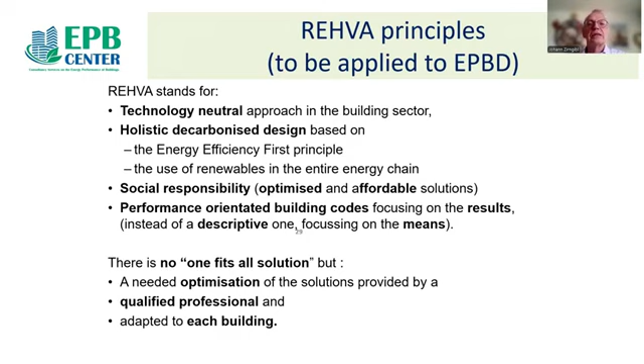Here are some examples of the requirements. For example, what is performance-oriented? Performance-oriented is to fix, for example, an emission level in CO2 grams per square meter and year. A descriptive, not technology neutral approach is saying, for example, phase out fossil fuels. So we will have a forbidden technology, and for the building designer it's much more complicated, with fewer possibilities to optimize the building.

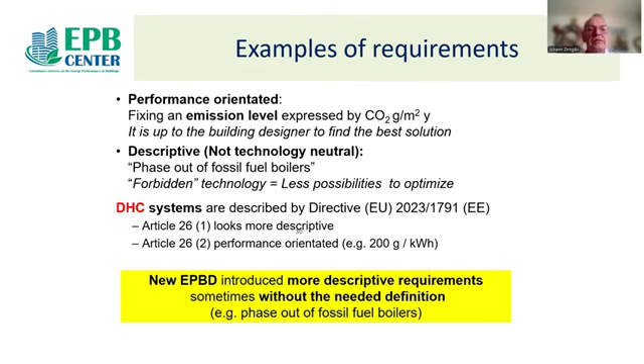I see that it's my old presentation, because in Article 26, for district heating, you have a description which is also performance-oriented, in Article 26-2. So to summarize, the new EPBD introduces, in our understanding, many more descriptive requirements, sometimes also without providing the needed definition. As Andras already said, it is, for example, the phase out of fossil fuel boilers. Next slide, please.

To really understand what is in the background of the requirements, the key definitions are key, and this is the first step for an unambiguous implementation. I put here some pictures just for illustration. No need to go into details; I will just recall some very important definitions, like primary energy. Here you have the primary energy classified by its origin, which is called perimeter. So you have on-site, nearby, and distant.

On-site and nearby are defined in the EPBD. Distant is everything which is not on-site or nearby, but it is not defined. So the perimeter is very important, especially for the ZEB definition. Other important definitions are primary energy, of course, and then you have to distinguish between renewable, non-renewable, and total. This is very important because if you set requirements in renewable, non-renewable, or total, the technical solutions behind them will be quite different.

Very much important is also the energy balance. Victoria told already about how you calculate the performance of the building. Do you take into account or not, for example, the exported energy, for example, by PV or something like this. This is absolutely key, and it is not defined in the EPBD. And of course, the assessment boundary, where you count the exported and the delivered energy.

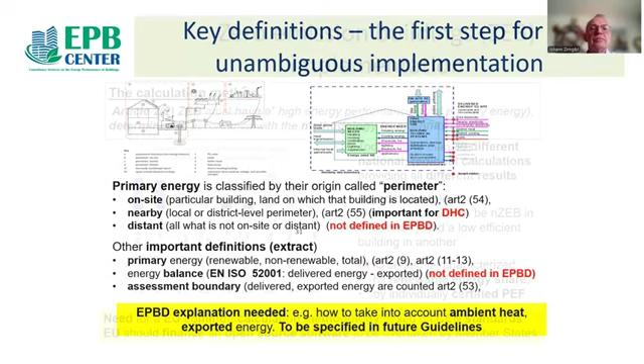Yeah, and now here it comes to the zero emission buildings implementation. The calculation method, Article 2.2 says that, of course, the energy performance has to be calculated according to the methodology of Annex I. So this is a calculation methodology. But it's a problem because today in Europe we have more than 30 different calculation methods providing all different results.

There is no comparability, and the same house can be a ZEB building, or let's say a near zero energy building in one country, and can be a very low efficient building in another, depending on the calculation method. And here in the picture, you just have some examples. No need to go into details, but for the same building, you see how only with different hypotheses you can reach quite different results. And of course, there is a need for a calculation method.

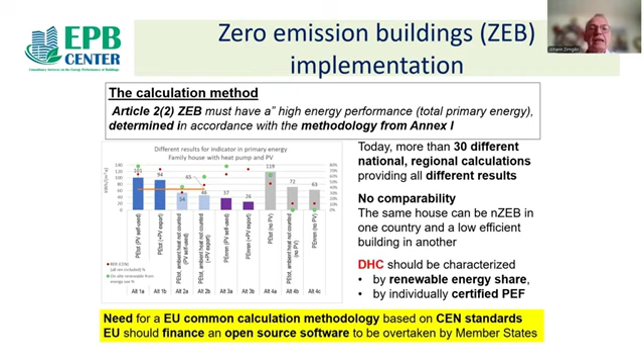We think that there is a need for a common European calculation methodology based on the European standards. And we think that here the Commission could help by, for example, financing an open source software kernel. Next slide, please.

Yeah, now it comes to this Article 11.7, where you have how to satisfy the total annual primary energy requirements. You see here quite a lot of things. I will go into the details in the next slides. But of course, you see that the zero emission building definition is key because it will be the target for the building stock in 2050. So it's extremely important.

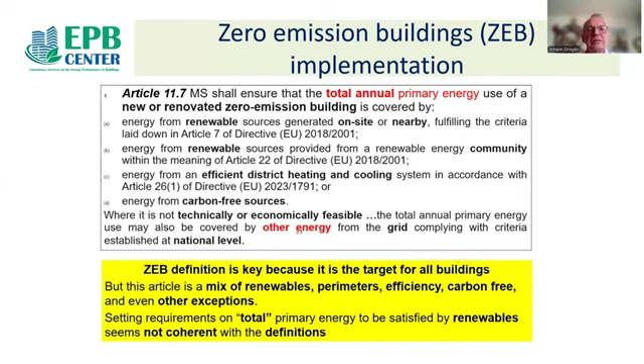You see also that it's a mix of renewables, perimeters, efficiency, carbon-free, and even other exceptions. So for us, it's a little bit surprising, all these different things. This is, of course, the influence of the different lobbies. And setting here the requirements in total primary energy, which has to be satisfied by renewables. Okay, things are a little bit complicated, and we will go into details. Next slide, please.

Yeah, here it is again. I come back to the details because here in this Article 11.7a, you will see total primary energy use. So what I wanted to explain was this annual, because annual is not explained in the EPBD now, but this will be done in the guidelines. Something which could be understandable is that you can sum up all the different options, which we just saw before, A to D, to reach 100% of total primary energy.

Okay, this is understandable. What is very interesting is that it is permitted that you can use energies with a carbon content, but then this carbon content you must compensate by the export of renewables. So this is very much important. And it has to be specified. And then, of course, in the implementation, it has to be specified if this annual compensation is done hourly or on a monthly or an annual basis, because then you will have quite different results.

So, and here is also, again, it's my old presentation, sorry. There are some mistakes in it. Of course, the annual basis means that there is a compensation allowed, and this allows the use of fossil fuels, not of non-fossil fuels, of fossil fuels, okay?

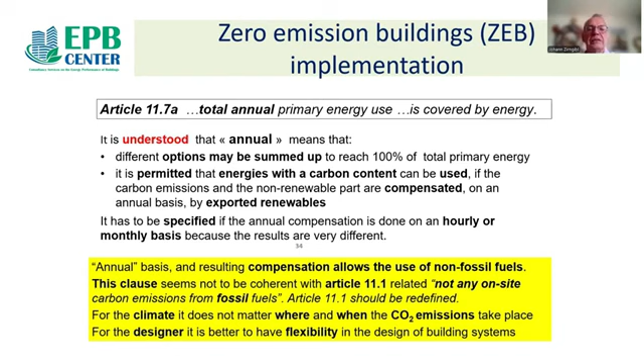And we see also that there is maybe some lack of coherency in the EPBD, because we do not see how this article is coherent with Article 11.1, where it is written that not any on-site carbon emissions from fossil fuels. For the climate, it doesn't matter where and when the CO2 emissions take place, but for the designer, it is very much important because this will give him much more flexibility in the design of the building systems. Next slide, please.

Here I focus again on this article, focusing on renewables on-site. A renewable on-site is ambient heat. It's not always defined how to take into account the ambient heat in the total primary energy, for example. So this is also very important.

But what is important here is when you look closely at it, we understand that only if the heat pump is driven by 100% renewable energy, it is ZEB compliant. This, of course, is very seldom the case. Very often the heat pump is driven by grid electricity, where you have fossil fuel, and then it is not 100% covered by renewable energy. That means the heat pump output must be completed by renewables from on-site or nearby. This is interesting to have in mind when we talk about the heat pump rollout.

Then coming to covered by renewables generated nearby. I said before how the different perimeters are defined. The most important thing here is that there must be a dedicated distribution, probably physical connections. And of course, renewables from nearby are defined by a specific primary energy factor. This could be very important because it could be a higher benefit to nearby. Next slide, please.

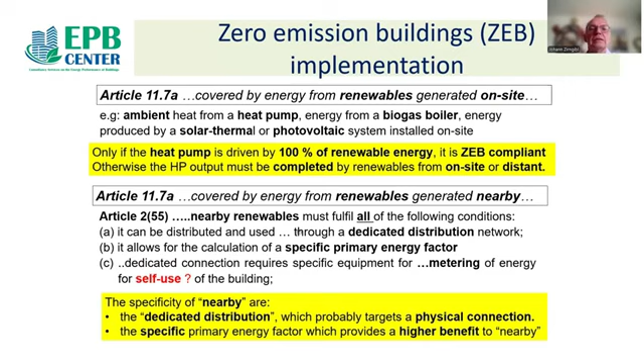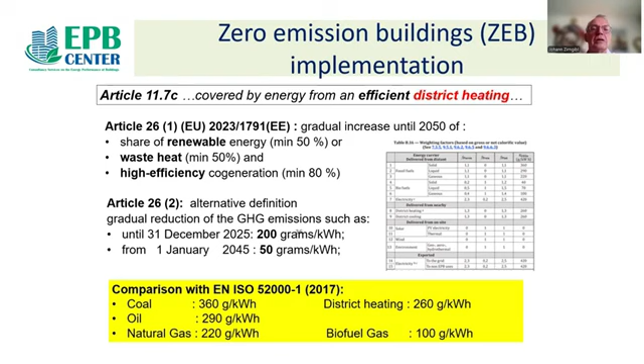And here you have the district heating. I will not go into the details. You all know Article 26 of the Energy Efficiency Directive, where you have the share of renewables, waste heat, and high efficiency. And you also have the alternative, which is greenhouse gas emissions. I put here for comparison what we have in the European standard 52000-1, to see the relation. For example, 200 grams per kilowatt hour. You can look at natural gas, where you have 220 grams per kilowatt hour, etc., just to give a comparison. Next slide, please.

Then something has been added that was not in the previous directive. It is this article again, D, which means energy from carbon-free sources. Carbon-free sources, this is nuclear energy and waste heat from district heating. This might be considered carbon-free. It's also not clearly defined in the directive. But carbon-free sources in general are part of the energy mix, for example, in the electricity grid. Therefore, in the implementation and the guidelines, it must be clearly stated that only the share of carbon-free sources in the energy mix shall be considered.

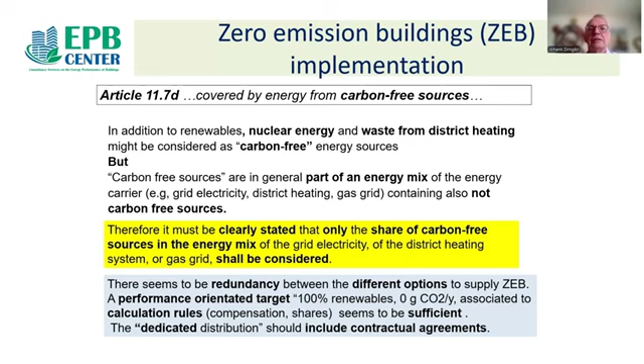So again, for us it seems that there is some redundancy between the different options. I think that a performance-oriented target, for example expressed by renewables or by CO2 emissions, would be sufficient. And there is a huge discussion whether dedicated distribution does or does not include contractual agreements. Next slide, please. And this is the end of my presentation.

So to summarize, to reach unambiguous requirements and coherent transpositions, there is a need for a common European calculation methodology and definitions. This is why we are advocating that the Commission should help to develop a European kernel. This is a software tool based on the European standards, which can be taken over by member states if wished. The few examples I showed before show that there is a need to complete the EPBD by guidance documents, and of course before the EPBD transposition at national level.

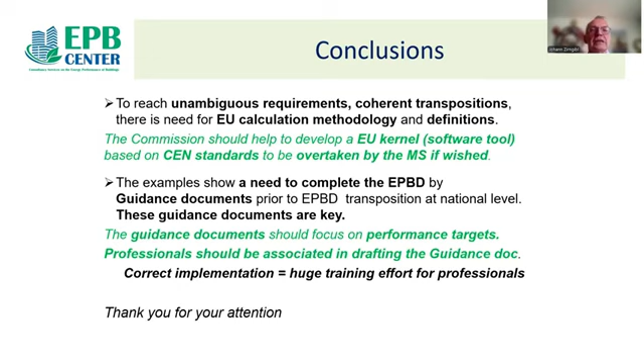We think that the guidance documents are key and should be focused on performance targets, not on the solutions to reach these targets. And professionals should be associated in drafting the guidelines, because feedback from the field, from practice, would be very useful to take into account in the guidelines and the implementations. And of course, correct implementation means that a huge training effort is needed for professionals in the next years.